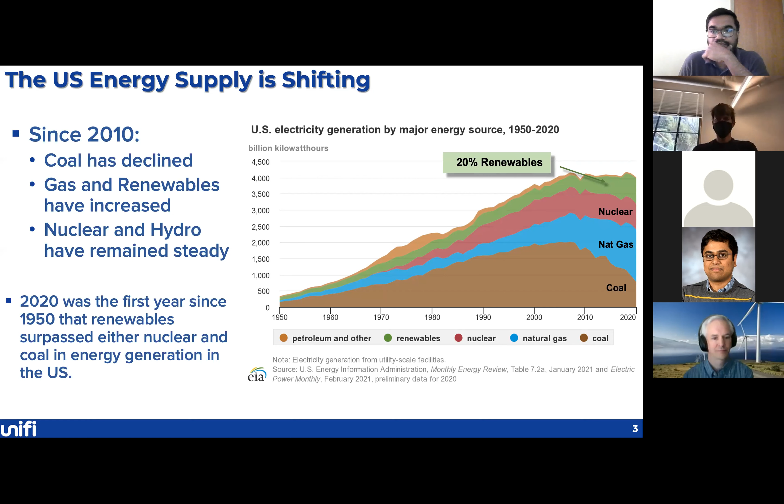But 2020 was the first year, at least on this graph, that renewables surpassed either nuclear or coal in energy generation in the US. So with a 20% energy share, that's a significant achievement where it finally passed coal and nuclear in energy generation. So let's dig in a little bit more to this renewables.

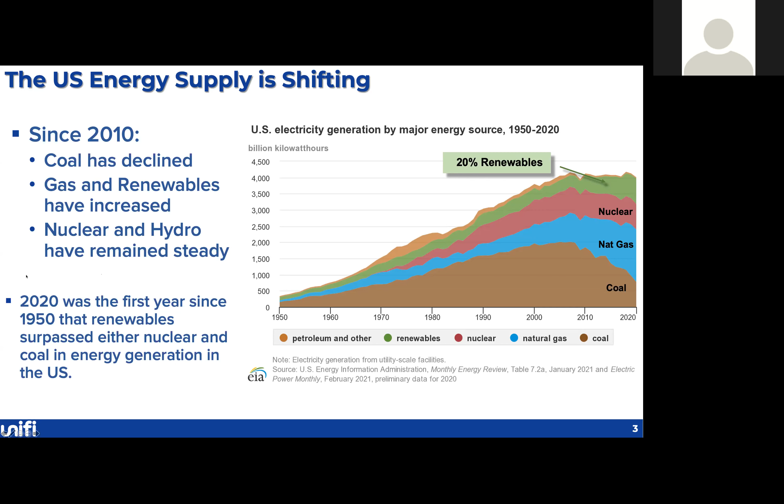So if we take a look at the renewable portion of that, the 20% that was annually produced from renewable sources, you see 8.5% from wind, 7.3% from hydro, 2.3% solar, and a little bit from biomass and geothermal. Again, 2020 was another watershed year in that wind actually produced more energy than hydropower. And you can see over the last several years that wind and solar are the two forms of energy that are the most rapidly increasing on the grid today.

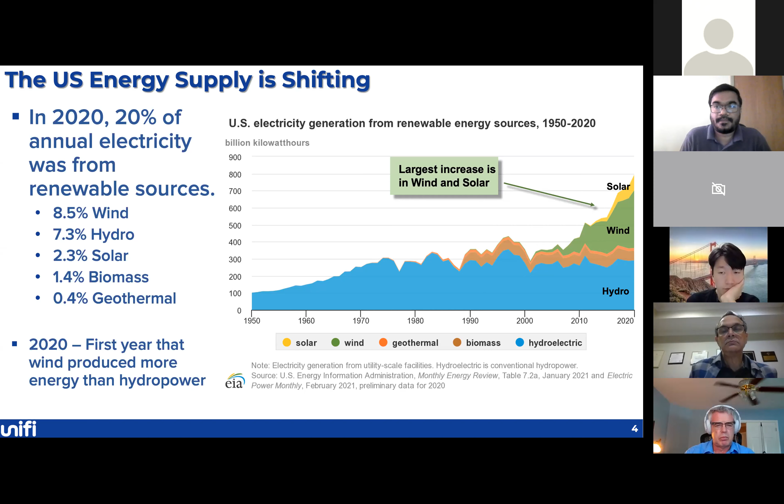So why is this really happening that renewables are starting to take off? We've been working on renewables for 30 plus years, trying to make them cost competitive. But really, finally, if you look down into the 2019, 2020 area, this is when utility scale wind and utility scale solar have become the most cost competitive forms of new energy. Now, this is across the entire United States, and depending on what region you're in, it's going to vary. But in general, we've seen these tremendous decreases, 70% in wind, 90% in solar over the last decade.

And although this is the levelized cost of electricity for new plants, and that's why a lot of new plants going in are either wind, solar, or natural gas, these prices are so low that they are actually rivaling the cost of electricity from existing nuclear and gas plants, and in a lot of cases around the country are below actual operating costs for existing coal plants. And this is just a huge change in the industry. And we are going to see this continue for the next decade plus, where wind and solar are going to be increasingly used because they are the lowest cost form of new electricity going in.

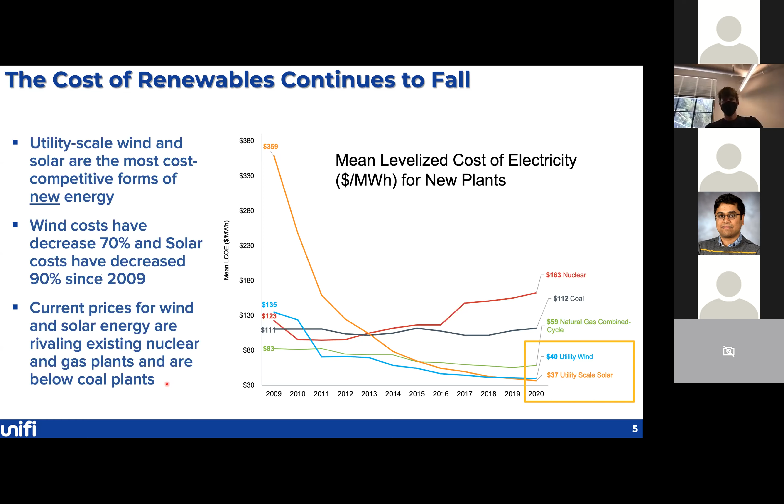So what's really driving this besides the economics? Economics is always going to be the main driver of practically everything that we do, but we're also seeing states and utilities across the United States put together clean energy targets. You can see from this graph here, there's quite a number of states that have state clean energy mandates over 50%, several that are 100% clean energy.

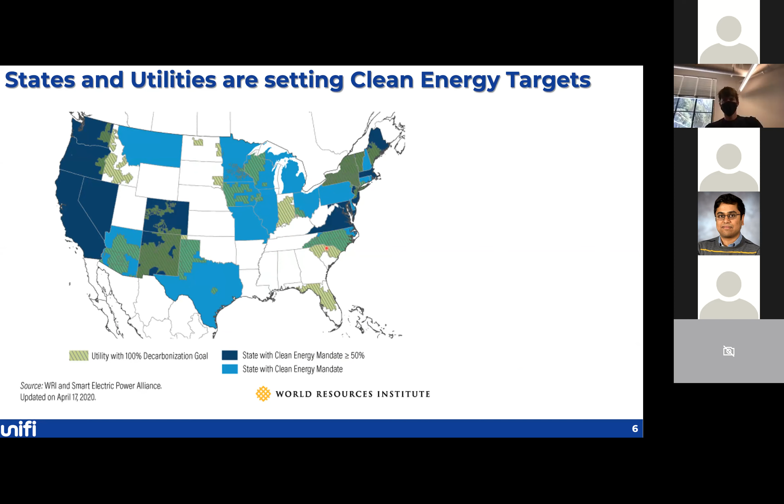And these green shaded areas you can see in here are utility service territories. So you have places like Xcel Energy here in the Midwest. You also have places like Duke Energy here in the Carolinas, where the individual utilities are setting these 100% decarbonization goals. And so a combination of these has really led to a push in clean energy technologies. Now, in addition to that, we have finally seen the new administration come up with these clean energy targets.

And if you take a look at what we're talking about, 100% clean electricity by 2035 and 100% clean energy economy by 2050. And the engineer, at least in me, is sitting there thinking, you know, what do these goals really mean? How aggressive are they?

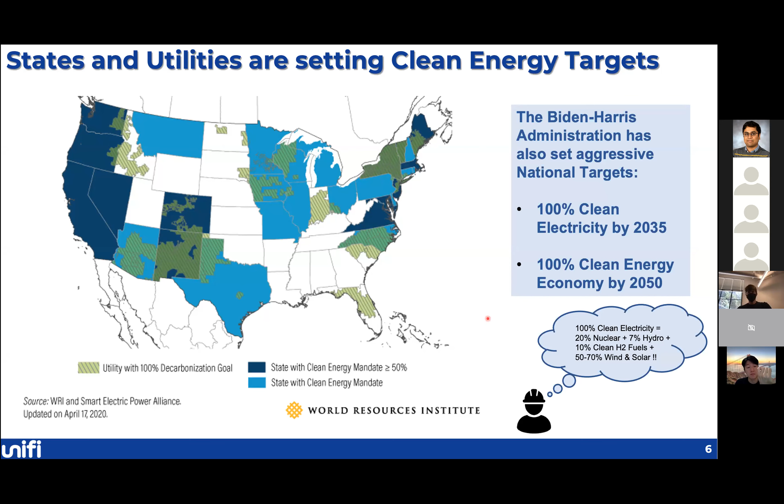If you take a little thought experiment and you say, 100% clean electricity by 2035, and we have 20% nuclear, 7% hydro, maybe you got 10% clean hydrogen fuels of some sort in the future, that still leaves like 50 to 70% that is going to have to be made up from wind and solar technologies. And this is a really big number. So let's remember that 50 to 70% of the entire system has to be made of wind and solar. So what do we need to do to get there?

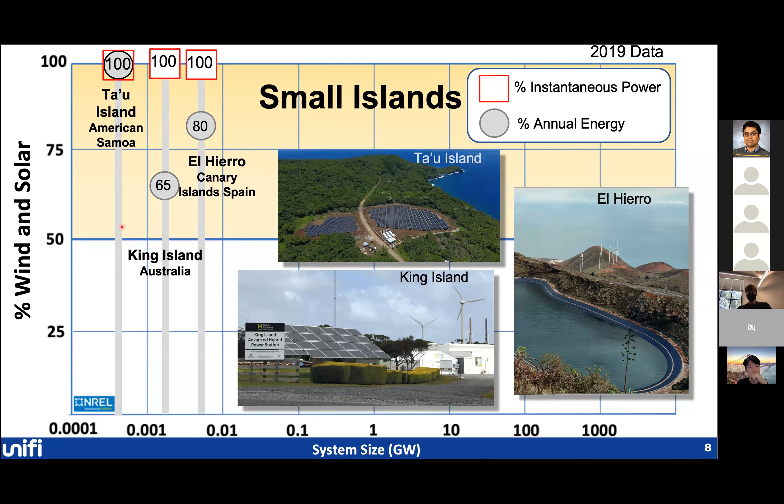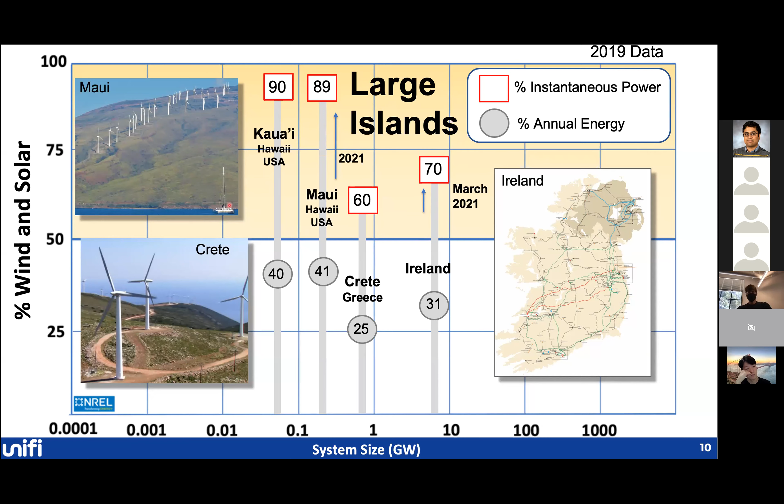In fact, this data is from 2019, and even since then, we've seen increases in these levels. As you can see here, Maui was just, as of this year, able to get up closer to 90%, and Ireland also got up around 70% on an instantaneous level. But you can see, even as we get larger and larger systems, we're not really getting to 100%. And there's a variety of technical reasons for this that we'll be going through in this presentation.

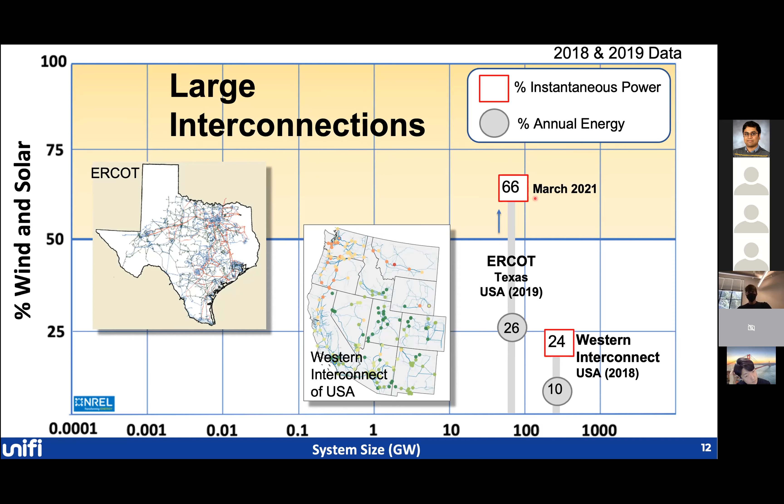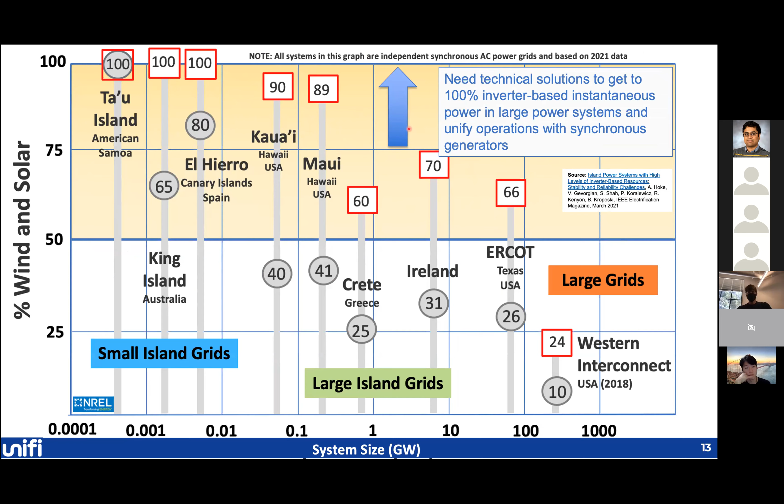But at the end of the day, what we need to be able to do is look at these large scale systems, figure out the technical constraints, and get them to operate as if they were some of these smaller scale island power systems. Now, this is a non-trivial problem to solve. But what we want to be able to do is come up with technical solutions to get us to 100% inverter-based on an instantaneous level with really large power systems. And to do this, we need to really unify the operations of inverter-based systems and synchronous generators.

So let's do a quick analysis, just kind of a thought study here, back of the envelope calculation, just to see why getting to 100% is so important. So let's do a little quick case study. This is using some data from EirGrid, which is the utility operator on the Irish power system.

If you look at their 2018 data, which is what we're going to look at, they were running around 65% instantaneously, which again is actually limited by the system operator, which got them to around 30% on an annual energy basis. But by 2030, they want to be getting up to 70% on an annual energy basis and 100% instantaneously. And why 70%? Well, that's on your way to a 100% clean energy system.

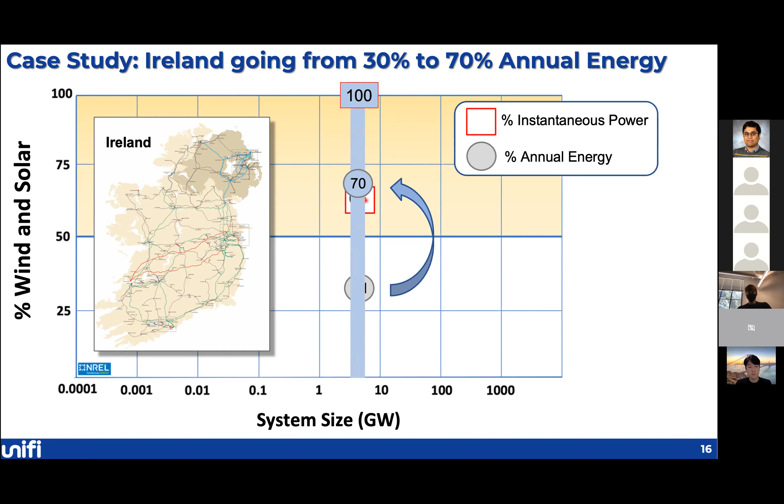And if you remember from an earlier slide, for the United States, that's probably where we need to be in the 2035 time period. So let's just take a quick look at this example to understand why getting to 100% is important. What you see here is the wind data from 2018 in the Irish power system. And you can see they're limiting the level of wind on this particular system to 65%. This is actually limited by the system operator themselves.

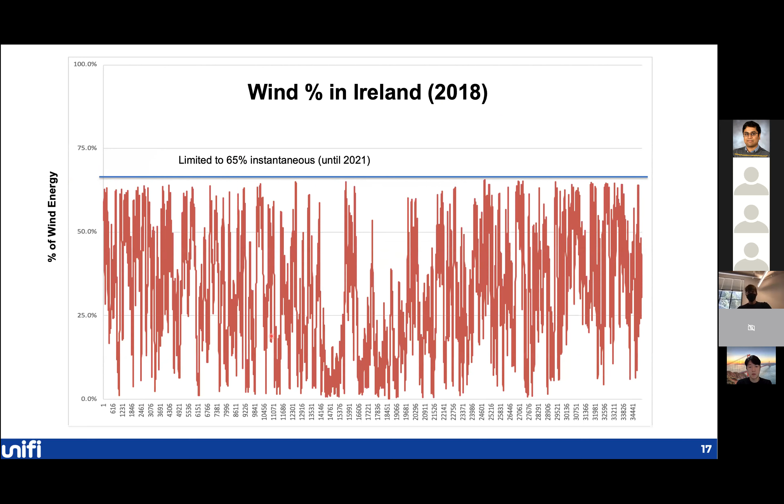And, back of the envelope, we just quickly multiplied these numbers by around 250%, or 2.5 times the amount. And that would give you enough energy to provide 70% of the annual energy needs by wind. But you can see all of a sudden we are getting way over 100% at any particular time.

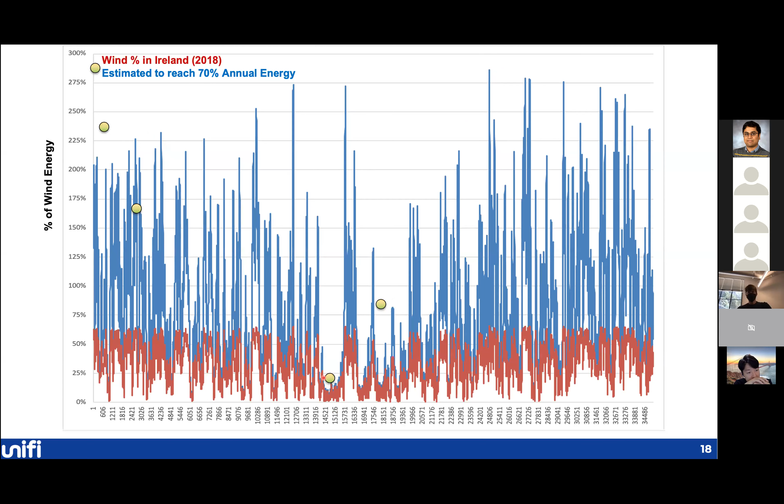Now this graph is pretty crazy to look at, so let's reorganize this data a little bit to make it a little simpler. What we're going to do is create something similar to what people in the power system know as a load duration curve, but we're going to create a variable renewable duration curve. So we're going to resort this data from high to low. We're going to slowly move all the data around, and then we create this curve.

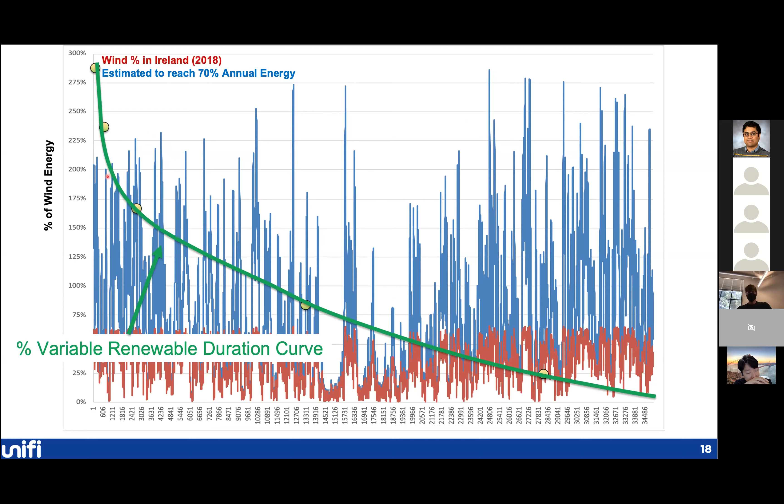We've resorted all these blue data points into this curve, which is called a variable renewable duration curve, and it really quickly helps you understand some important parts of the system. So now what I've done is I've transposed that 70% renewable duration curve on here, and then the 30% or 29% duration curve. And if you take a look at this, some important things come across.

First off, this amount of energy is provided by wind, which is 30% of the area under this flat line. And the rest of this has got to be provided by other sources, whether it's coal or natural gas or whatever resources you have available. But at the same time, you can't go over 100%. So you're having to basically curtail all of this electricity here.

Now, if all of a sudden we were able to install up to 70% wind, we wouldn't magically get that much energy, because if, for example, we're still limiting the instantaneous level to 65%, we would only pick up this amount of the curve here. And so now instead of 30%, we actually get up to around 45% on an annual basis. And still you need other sources to provide the rest of that energy. And we had to curtail all of this wind here.

Now, if we think about what we really want to be able to do, it's come up with some type of technical solution to get us to 100%, because that frees up a really big chunk of this annual energy that we're currently curtailing. So if we were able to go to 100%, instead of 45%, we're now up to 58%, and that's getting us a lot closer to this 50 to 70% overall need on the system.

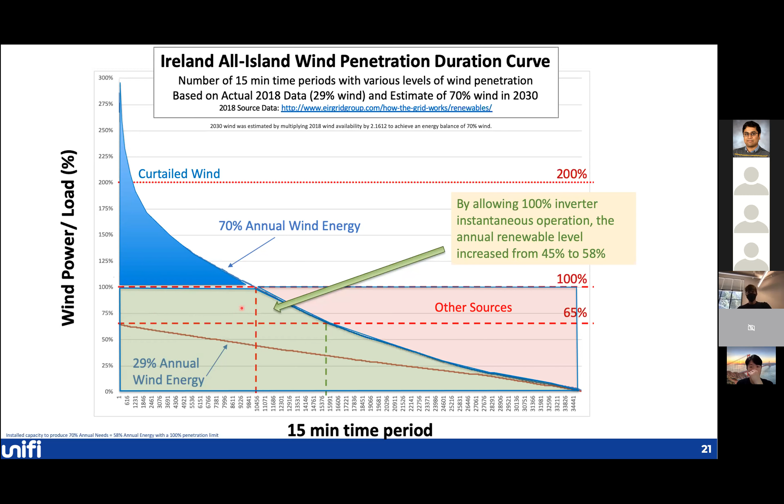Now, of course, I'm just doing it for Ireland here, but if you do this for any particular system, you will get something similar, where going to 100% instantaneously will allow you to pick up the most cost-effective portion of electricity. Now you can see we're still curtailing a lot of electricity in this scenario, but at the end of the day, that has to be solved with things like energy storage, increased transmission, or demand response or moving load.

But the biggest and cheapest and quickest way to access the most renewable energy will be through getting this to 100% instantaneous levels of inverter-based resources. And that's really why I'm saying that this is the most critical problem to work on in the short term. Longer term, we're going to have to solve all these additional problems to get and move this excess energy over into this portion here and reduce our dependency on other sources.

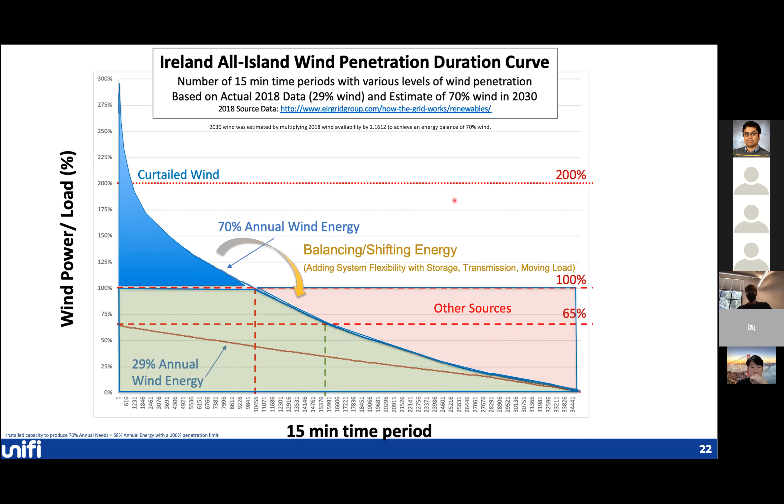Okay, so that kind of explains why we want to try to get to 100% and why that's so critically important. If we take a look at inverters and machines together, let's understand why this is a challenge and what we need to address. So if we take a look at currently operating large-scale power systems, for the most part, they're based on synchronous generator technology. So whether it's hydropower, coal, nuclear, natural gas, all of these have a synchronous generator inside of them.

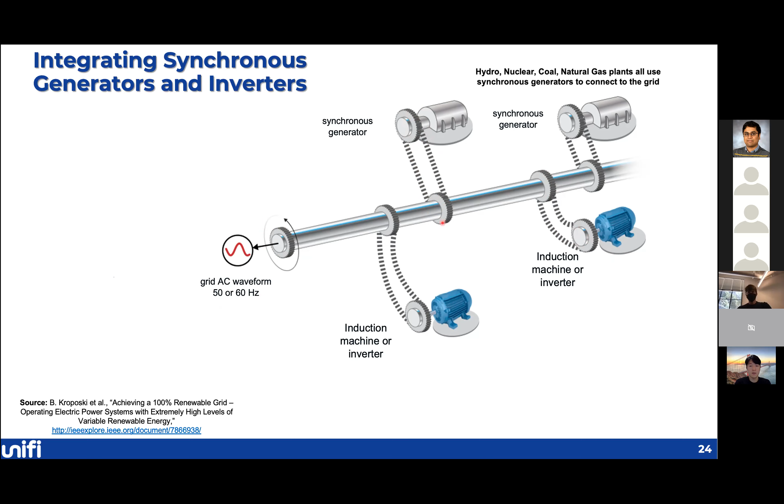And when we electrically connect them together, so you can imagine this being a transmission line connecting two generators together, we create a large virtual power machine that is all synchronized together and outputting an AC waveform, whether that's at 50 hertz like in Europe or 60 hertz in the United States. When you connect induction machines or inverter-based technology, they don't necessarily have a physical connection that is created by these synchronous generators. So you have a somewhat looser connection, if you will.

But what we need to do in the future is, as we develop PV and wind technologies and inverters, that they sort of replicate what's going on in synchronous generators, although they don't have all the physical characteristics. But if we can come up with sort of rules of the road on how to unify the operations of synchronous generators and other synchronous machines and inverter-based resources at any scale, that will enable us to either run at 100% inverters, 100% synchronous generators, or everywhere in between, which is what we're going to need in future power systems with wind and solar resources varying throughout the day.

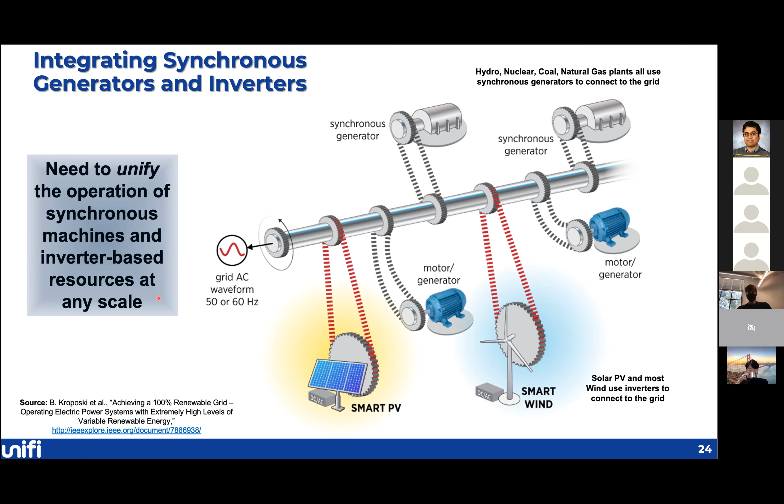There are a variety of technical challenges with inverter-based technologies, and this particular consortium is going to focus on trying to address a lot of these. I'll highlight them here, even though I won't go into massive amounts of detail. We'll be doing those in future parts of this seminar series. But if you think about the system, we always need to be able to maintain frequency stability and voltage stability. So those will be critical aspects.

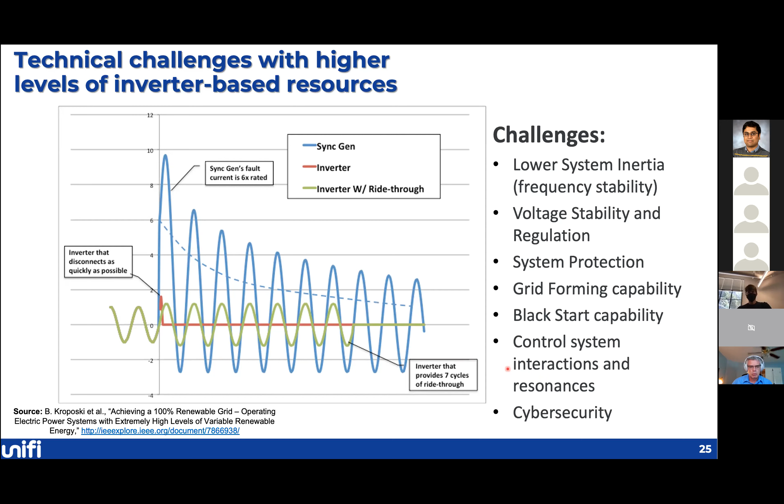Let me just real quickly go back to this black start capability because I wanted to highlight an example of grid forming technologies. This is actually an example of not even a project. This was actually a necessity that we had at NREL, where we were able to run our building loads on a large PV plant plus a wind turbine plus a battery. For over 72 hours, we provided these building loads in this 100% wind PV battery grid during a site outage that we had at our Flatirons campus.

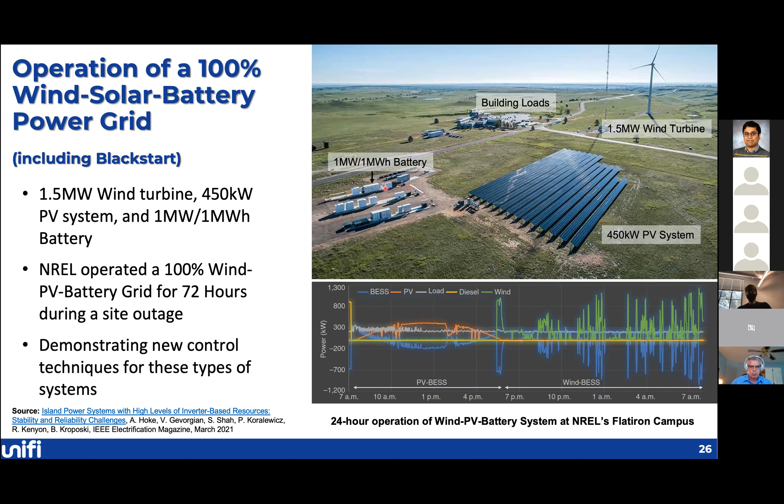But even though we were able to demonstrate this, one of the things that we would like to eventually do is have all the inverters that were associated with these different components actually all be independently grid forming and compatible with each other. In this particular case, we were able to run this system because we had one device, the battery system, that acted as the grid forming and grid reference signal in the system.

So I've explained a little bit about what's going on in the power system industry currently with renewables. I've explained what we know about how to operate grids. And I've explained why getting to 100% inverter-based grids is critically important. But let's talk about what we really are starting here, which is the UNIFI Consortium, a way of bringing the industry together to solve all of these challenges and enable these types of systems. So our vision for the future is power systems that have any mix of machines and inverter-based resources at any scale that enable this affordable, secure, reliable, clean, and resilient power grid.

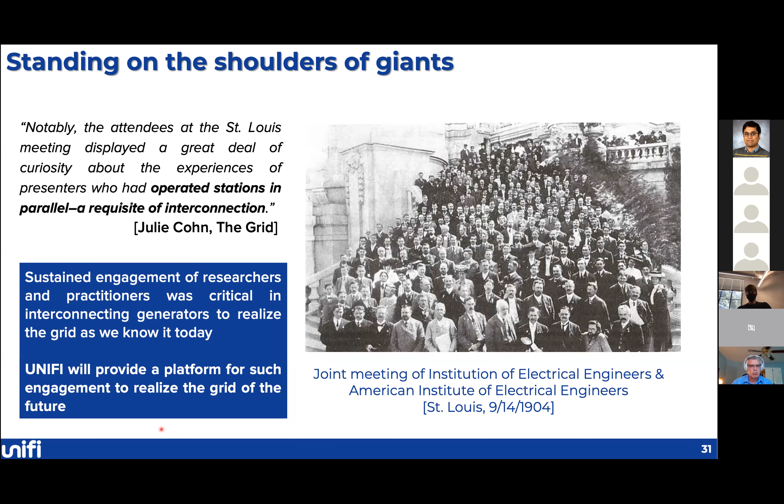And UNIFI is going to provide this platform for engagement to realize the grid of the future, where we're integrating inverter-based resources and synchronous generators completely together. So what do we plan to do inside this consortium? If we think about it, we're going to unify the old technology, the synchronous machines, and the new technologies with grid forming and grid following inverters.

We're going to unify local controls and global controls across the system. We need to unify how these things operate at both slow and fast timescales to be compatible with each other. We also need to unify how large-scale inverters and aggregations of these technologies integrate with much smaller, because inverters are unique. They can be all the way from 200 watts up to several megawatts. And finally, we're going to unify how solar, wind, and storage technologies integrate with the electric power system to create this clean grid of the future.

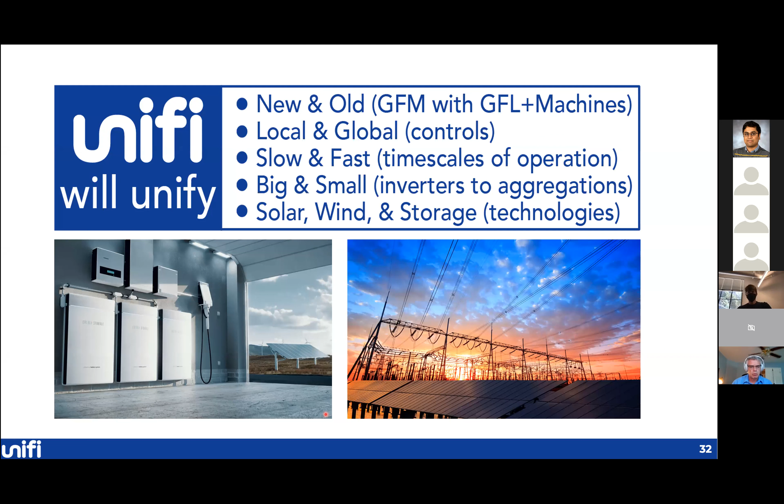In addition to the project partners, which are partners that are either receiving DOE funds or contributing cost share, we have an additional set of industry partners that we're reaching out to across the entire scope. So additional sets of utilities, additional vendors, additional software providers and system operators, as well as other consortia that are in this space in power systems or in power electronics. But we are looking at a kind of connection between the power system world and the power electronic world in a way that allows for this entire grid to operate smoothly.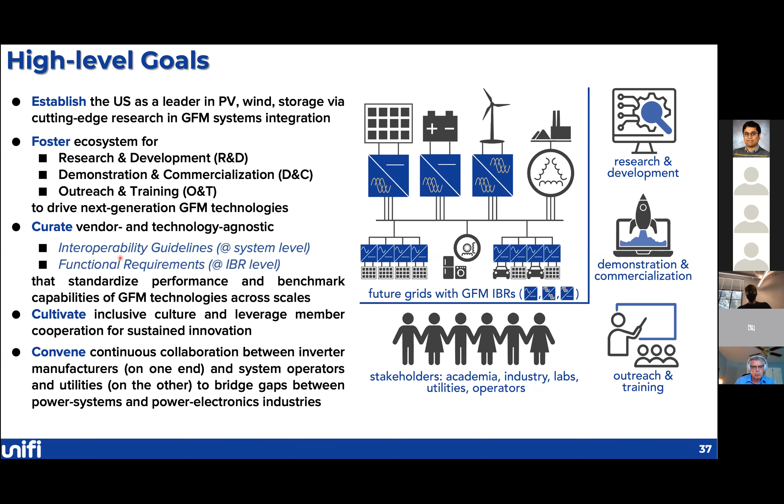So let me talk a little bit about these interoperability guidelines and functional requirements, because this is the key piece of this consortium that will be developed over the next several years. Even this year, we'll start at this, and then through research, demonstration, and collaboration, we'll be able to eventually translate a lot of these breakthroughs into more standardized products and standards.

So if we take a look at interoperability guidelines, what we're really focused on there is how do we promote the coordination and seamless operation of many different grid forming technologies from multiple vendors while ensuring stability and reliability. So this is the key thing here, right? From a systems level perspective, they just want all of these different technologies to connect, make sure the system is stable and reliable, but from many different vendors that are going to be providing inverter-based technologies.

So we'll be looking at how do you develop scalable secondary controls? How do you maintain system level stability? How do you look at voltage and frequency regulation, black start capabilities, and ensure cyber secure communications across these areas?

When you go down to the functional requirements from individual grid forming plants or individual inverters themselves, how do we make sure that we're specifying how these requirements operate so that they are developed in a vendor agnostic fashion and satisfy all the system level requirements coming from the top level system? Inside there, you're talking about real-time control with dynamic protection, autonomous primary control signals. How do you manage the input and output from communication signals? How do you look at aggregations to maintain stability, and what type of power quality and protection requirements are needed?

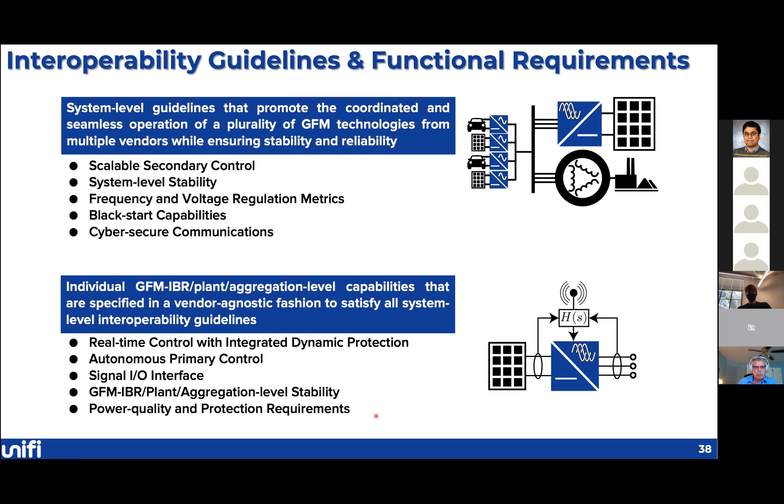So this is really the heart of the consortium itself. To develop this, we're going to need the entire industry to get on board and move this forward.

So just to start wrapping this up, as you saw here, our UNIFI consortium is starting off with 4 national labs, 12 universities, 6 inverter manufacturers, 8 utilities, 2 system operators, and 3 real-time simulation and software vendors. But the reality is we are trying to get the entire industry connected to this project. We have over 80 letters of support on this particular project, and we'll be reaching out to many more parts of the industry as we move this forward.

This particular group of people did the initial development around droop control and virtual oscillator control that you may have heard so much about if you're in this grid forming space. We've got lots of experience doing large demonstrations of inverter-based resources providing grid services. The team has extensive experience in the standards organizations and leadership roles in IEEE 1547 and the new P2800 standards. And we've really tried to put together a broad coalition of the world-renowned experts in this space.

The key goal here is to unify the integration of machine and inverter technologies. As we've seen in the past, interoperability drove the interconnections that we have today, and interoperability will drive the innovation of the grid of the future. And we think that UNIFI can be a key driving force in the U.S. power sector and renewable energy industries to achieve 100% clean power by 2035.